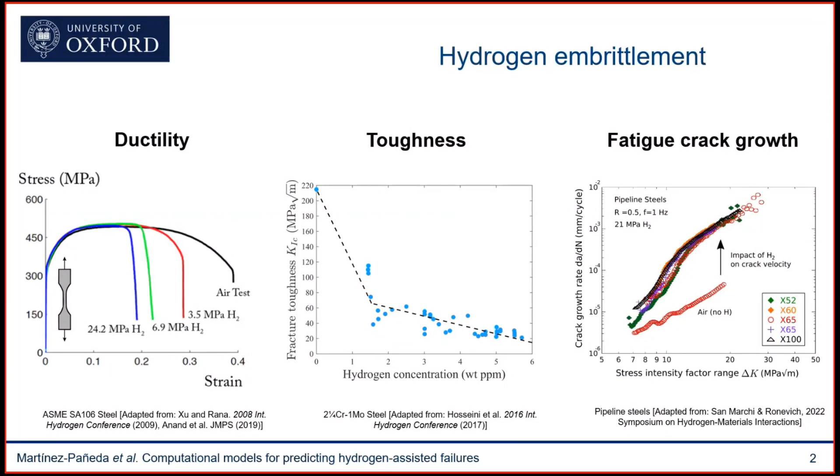Let me tell you a little bit of what we can do, and this will be the content of my talk. I will first start by telling you the ingredients of the model. What does the model do? What is the model based on?

Then I will show you some representative results showing how the model can predict hydrogen-assisted failures, not only at the lab scale, but also at scales relevant to engineering practice. And then I will finish with two case studies that I think will be of interest to many of us here.

The first one is trying to use the model to efficiently and cheaply conduct virtual fatigue experiments. There are only a few labs in the world able to run hydrogen-assisted fatigue crack growth tests in the presence of high hydrogen pressures. The plan is to show with the models first whether we can predict those experiments, and second, whether we can do virtual experiments to fill the gaps, so to say.

The second case study is that, as I said before, there's a lot of discussion on whether we can transport hydrogen in existing pipeline infrastructure. There again, of course, the critical problems relate to welds, which are typically the weakest link within that pipeline infrastructure. So we will use the model to show whether we can deliver predictions on what's the critical pressure at which we can transport hydrogen in those pipelines.

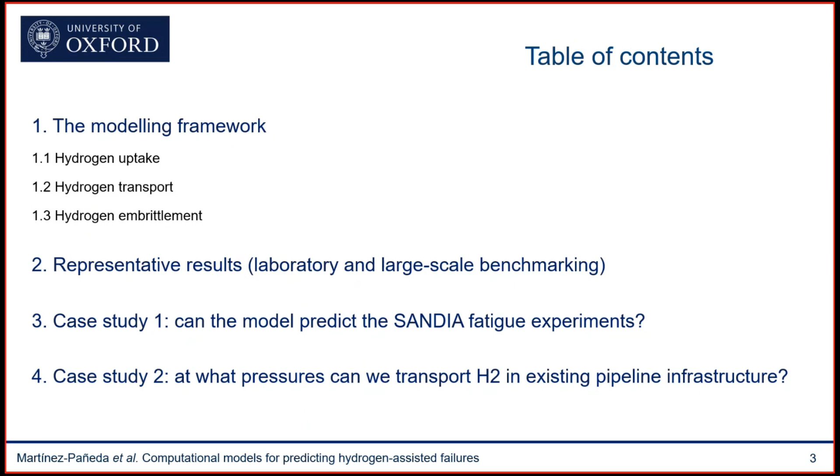This is another area where models are critical, because we know that the conditions relevant to welds are very difficult to replicate in laboratory experiments. It's also very difficult to run experiments on real large-scale pipes, because there's an oxide layer that takes significant action to be disrupted, and that oxide layer prevents hydrogen uptake. So you may be running these very expensive large-scale trials and getting nothing out of them, basically. So models, again, can make a difference.

So let me describe our modeling framework. I think there's two things I would say here. The first is that there have always been models, in the sense that you can always go to your lab, obtain a few data points, fit those data points with a polynomial function, and then claim that this is a model, but this is purely fitting.

What we wanted to do was propose a physically based model, a mechanistic model. By this I mean a model that explicitly resolves all the physical processes involved in hydrogen embrittlement, and that takes as input only physical parameters, material properties that we can independently measure in our lab. So this has always been our objective.

Only, I think by being mechanistic, by resolving the physical processes, by taking as input physical parameters, we can be confident that our model is not only able to interpolate between the experimental data points, but it's also able to extrapolate. And this is key in these hydrogen energy applications.

So let me walk you through each of the steps involved in the development of our modeling framework. I will be dividing the work into the three key stages involved in hydrogen embrittlement.

One is the uptake of hydrogen into the metal. This is quantifying how much, for a given environment, hydrogen enters the metal. The second is the transport of hydrogen in the metal, so quantifying the diffusion of hydrogen within the crystal structure and its trapping, sequestration at microstructural defects. And then the last one is the embrittlement process itself, the nucleation and growth of cracks due to the accumulation of hydrogen in critical interfaces.

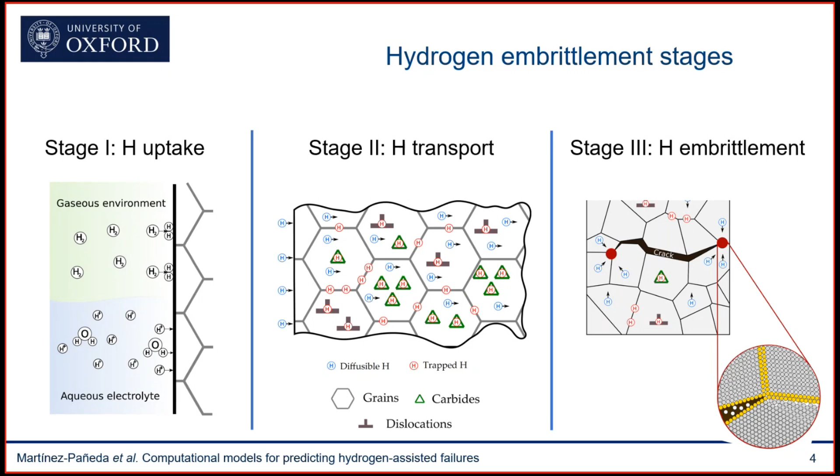So let me start with the hydrogen uptake. As I said before, the goal here is to quantitatively relate a given environment—it could be a gaseous environment or an aqueous electrolyte environment—with a hydrogen content at the surface of the metal, or a hydrogen absorption.

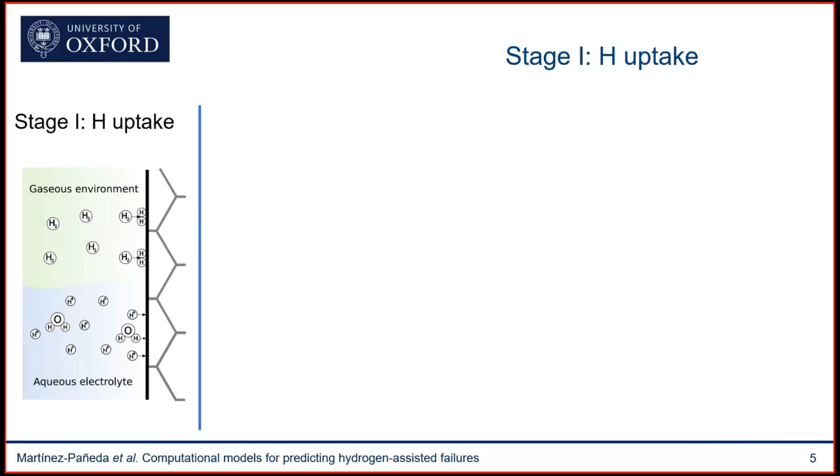I think the good news here is that when we are dealing with gaseous environments, this is relatively well understood, particularly if we're talking about steady state conditions. Kinetic effects are another business. But for steady state conditions, we know that in gaseous environments we can use a closed form expression, like Sievert's law or the Abel-Noble equation, to obtain an estimate of the hydrogen concentration at the surface of the metal as a function of the hydrogen pressure or fugacity.

And the only thing I want to emphasize here is that the coupling with mechanics is quite important. As you can see here, the solubility of the material depends on the hydrostatic stress.

So it's important not to neglect this term, otherwise you're going to significantly underpredict what is the hydrogen uptake ahead of cracks and other stress concentrators.

So that's the good news. The bad news is when you're looking at aqueous electrolytes, when you're looking at hydrogen uptake from aqueous electrolytes, such as seawater, for example, then the picture is much more complicated, because then you need to resolve not only the surface reactions taking place at the electrolyte metal surface, but also the electrochemical behavior of the electrolyte, which can be very different inside of occluded crack environments, such as cracks and pits and other defects, relative to the bulk, which is where you typically conduct your measurements.

However, I think the good news is that we know what are the differential equations that describe the physics of the electrochemistry of electrolytes, and we know what are the equations that describe the hydrogen evolution reactions, the Tafel-Volmer-Heyrovsky and absorption reactions. So we can formulate a theory and then implement that theory into a finite element context and obtain predictions for this.

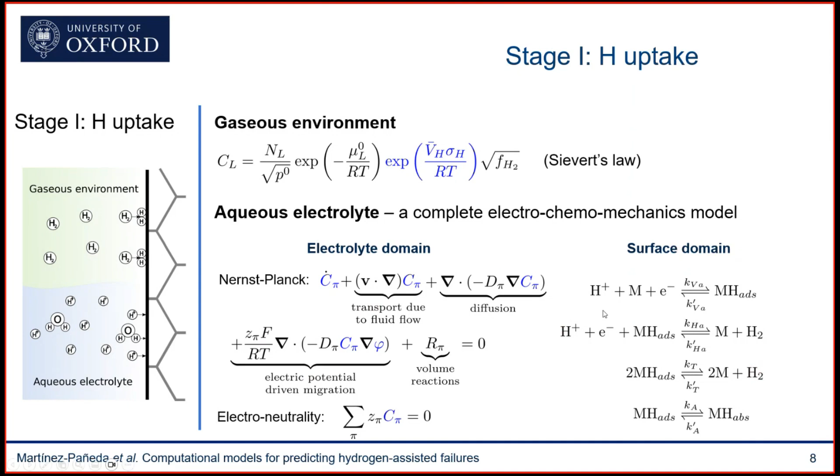So this is how the finite element model looks like. You may have an electrolyte domain, which has as many ionic species as needed, and then you have an electric potential as well. Then you have a metal domain, which might contain a crack or the type of defect where you're solving your mechanical problem, and you're also solving for the uptake of hydrogen and the transport of hydrogen. And then you have an interface between the two where you're solving for the hydrogen surface coverage.

I think the one thing that one immediately realizes here is that there's a lot of degrees of freedom. All of these things that I'm saying are degrees of freedom in your finite element model. So you have maybe 12, 15 degrees of freedom, depending on your problem, if it's 2D, 3D, how many ionic species you have. And solving this, 10 years ago, was unthinkable, but nowadays computers are powerful enough so that we can solve these problems without issues.

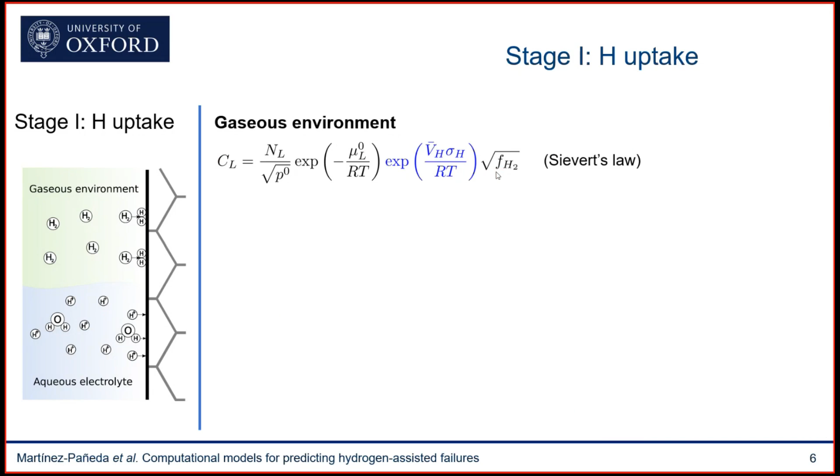And then we just need to go back to Sieverts' law and say, okay, since we know what is the hydrogen concentration, we can solve for the pressure, and we know that for this electrochemical environment, this is equivalent to testing metals in this other hydrogen gas pressure environment.

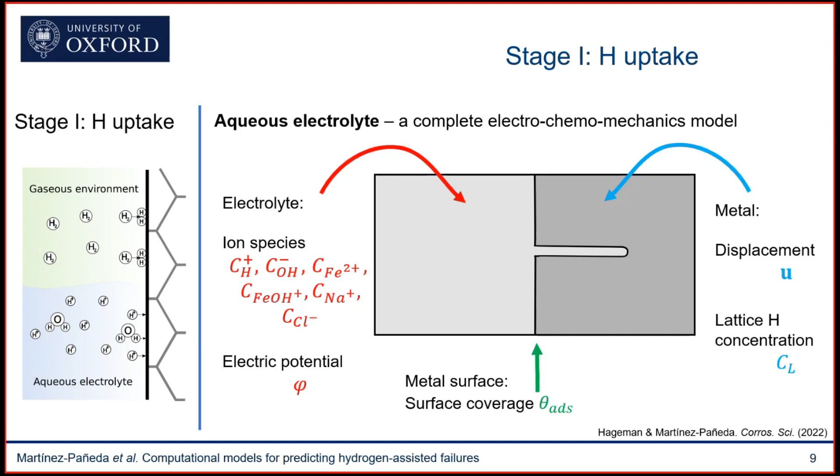And this is very good because not only does it allow us to leverage decades of electrochemical environmental research, but we can also do our experiments in much safer and cheaper conditions and obtain meaningful results, and plot our data as a function of hydrogen concentration, which can be directly connected to pressure.

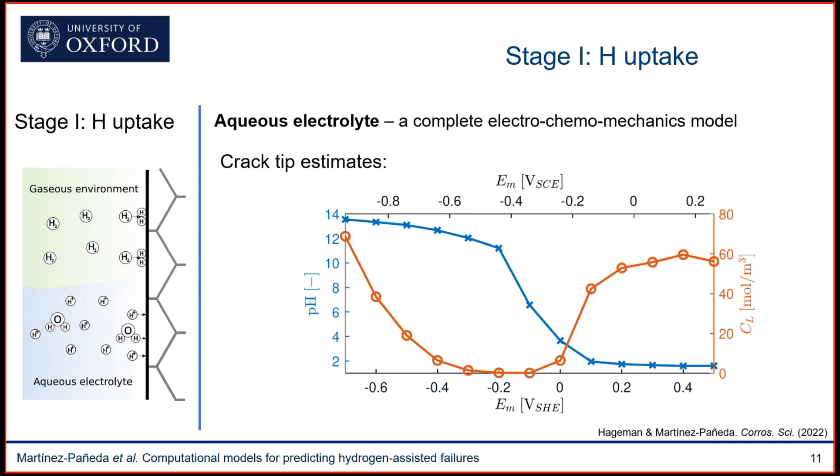That is one of the key questions in our community—this idea of the equivalent fugacity—that could be addressed with these models. Once we know how much hydrogen we have into the metal, we go to the second stage: we need to predict the hydrogen distribution within our component or microstructure, so quantify hydrogen transport and trapping.

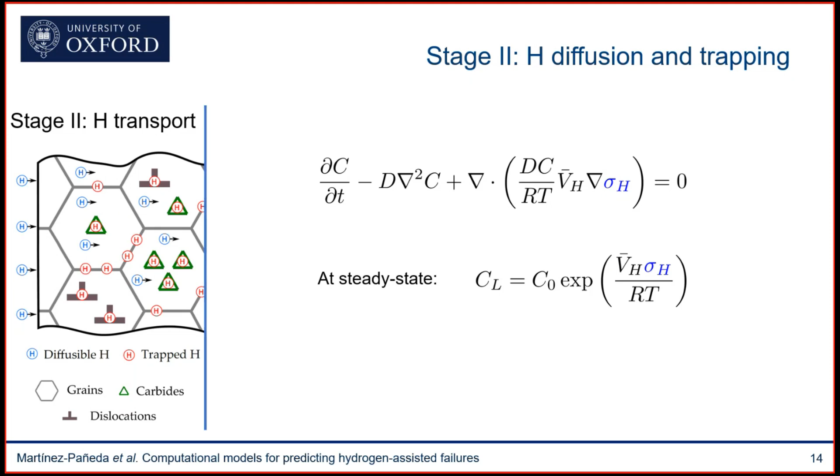But this is only one part of the picture. Hydrogen not only diffuses freely through the crystal lattice, it's also sequestered at microstructural features such as traps or defects. So we have developed more generalized extended formulations that account for these multiple trapping conditions, based on either Oriani's equilibrium or McNabb-Foster kinetics. One aspect I want to emphasize: if you want to predict hydrogen distribution within your microstructure and consider multiple types of traps, you need these multi-trap models because you need to quantify the binding energy and trap density for each defect.

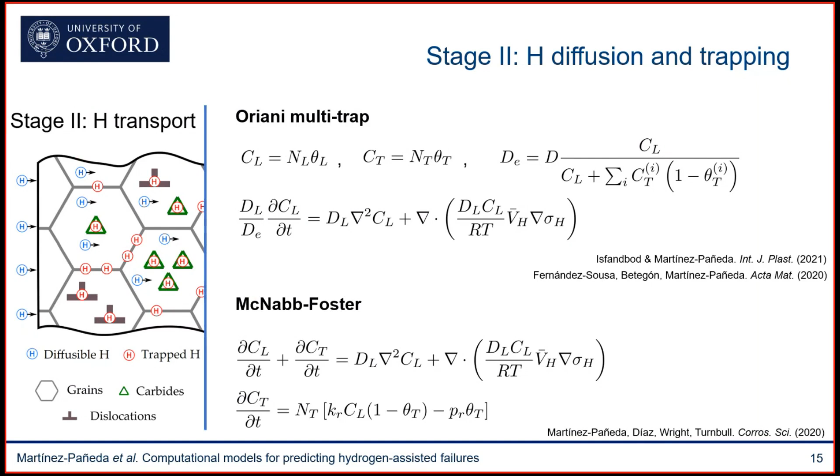You can have hydrogen trapped in grain boundaries and carbides. But when dealing with these locations, you need to account for the role that geometrically necessary dislocations play. Most models I've seen for hydrogen trapping consider only statistically stored dislocations related to plastic strains, but we should also consider GNDs, because experiments show they are very significant and dominate dislocation behavior near cracks and inclusions. So if you want to quantify hydrogen distribution at these locations, you need to quantify these GNDs related to plastic strain gradients.

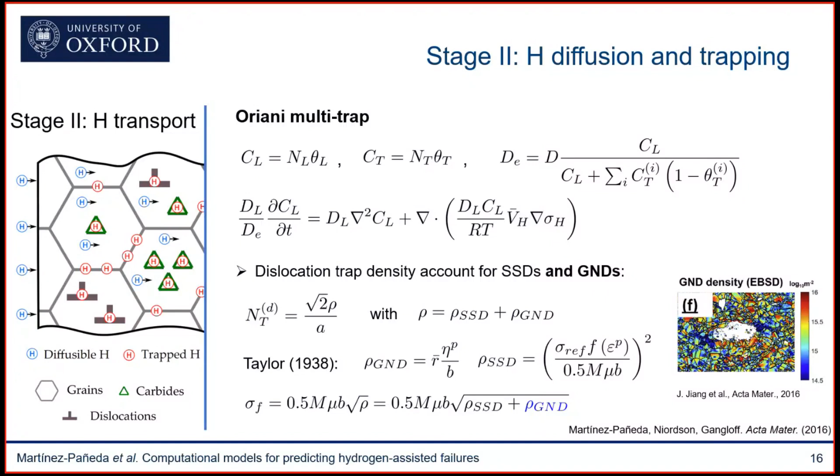This is important not only due to the role these locations play on trapping, but also due to the role GNDs play on elevating crack tip stresses. We know these GNDs act as obstacles to the movement of dislocations, and therefore bring local hardening in areas with high gradients of plastic deformation.

You can see this here—these are the tensile stresses ahead of a crack tip. There's a crack here, and I'm plotting the tensile stress ahead of it. Far away from the crack tip, predictions using constitutive models that account for GNDs—so-called strain gradient plasticity models—coincide with conventional plasticity. But as you approach the crack tip, there's a very significant stress elevation associated with the GNDs, with these plastic strain gradients.

This significant stress elevation near the crack tip, over the critical distance that matters for hydrogen-assisted fracture, is going to drive the hydrogen content near the crack tip as well. You can see it here—this is a log plot showing much higher predicted hydrogen concentrations when you account for the role GNDs play on crack tip stresses.

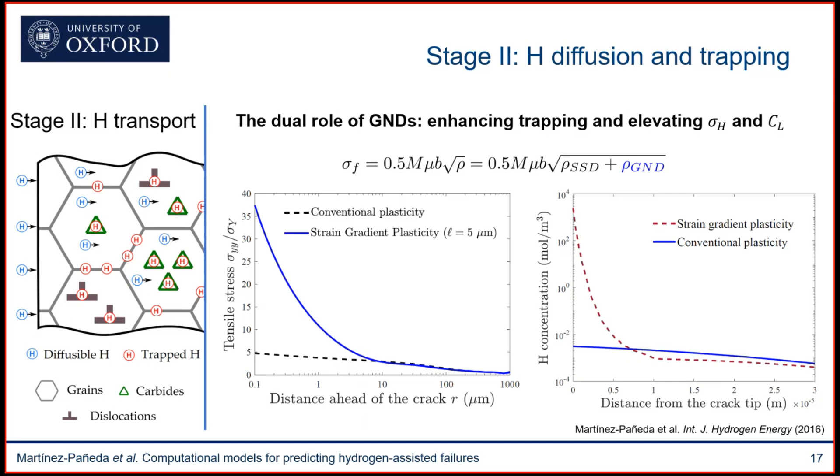And as I'll show later, this is also important because I would say this is the only way to rationalize the decohesion mechanisms.

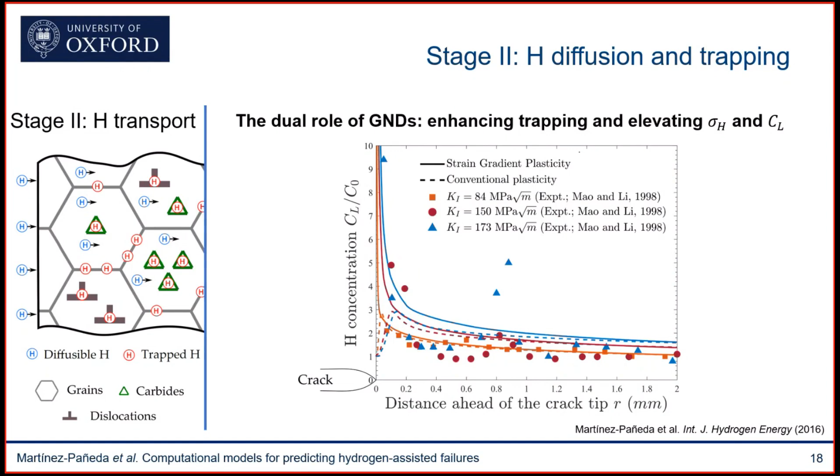We know that the decohesion arguments need higher hydrogen concentration than the higher crack tip stresses, and these GND effects, in my opinion, provide a solid argument behind them. So once you know how much hydrogen you have within your material, within your microstructure, then it's time to predict the fracture, the embrittlement process itself.

One aspect I'd like to mention is that the complexity here comes from the computational side. Predicting the evolution of cracks or other discontinuities is quite a challenging problem. You may have to apply moving boundary conditions, and you need to change your finite element mesh. It's quite a complicated problem.

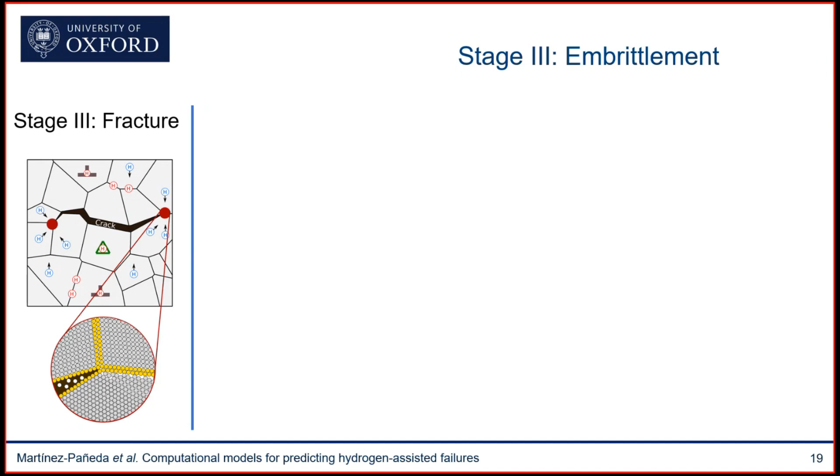But there has been a development in the computational fracture mechanics community that, in my opinion, has really changed dramatically the way we can tackle these problems, and made our life significantly easier. That is the development of the so-called phase field models. This is the approach we followed, and the idea is quite simple.

Whenever you have two phases, it could be a cracked phase and a solid phase, intact material points, you can treat that interface as discontinuous, or you can smear that interface over a finite domain and use an auxiliary variable, the phase field, to describe where the interface lies. This implicit treatment of interfaces is computationally very compelling for multiple reasons.

One reason is that the interface equation is defined in the entire domain, so there's no need for any special treatment. Another is that topological changes such as division or merging of interfaces are naturally captured. A final convenient aspect is that the interface equation can be easily combined with equations describing other physical phenomena.

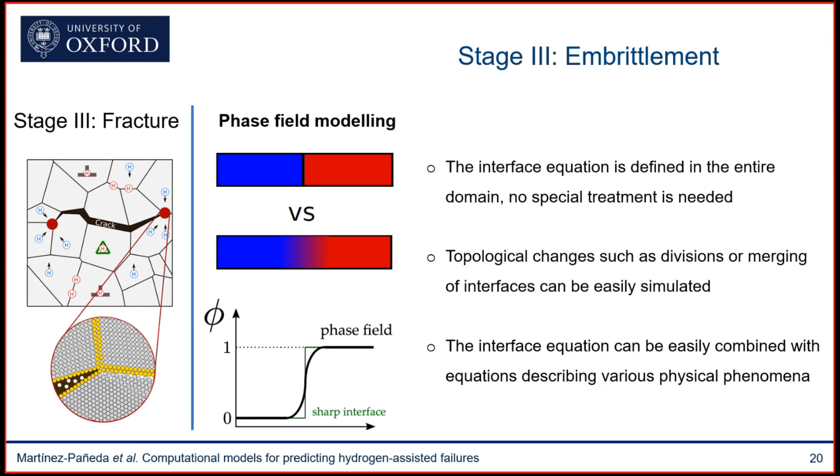Phase field modeling has been a revolution in many areas of science and engineering. It all started in the condensed matter physics community, where it's now by far the most widely used technique to simulate microstructural evolution. It has very quickly become the dominant tool also in fracture mechanics.

We have recently shown that this paradigm can also be extended to corrosion. You can use these phase field models to describe the evolution of the corrosion front, the interface between the aqueous electrolyte and the metal, and therefore resolve the physical processes involved in corrosion.

But what I'm focusing on today is fracture mechanics, and as you can clearly see, you can capture problems of arbitrary complexity. You can see here multiple cracks, crack branching, coalescence of multiple cracks, initiation of cracks on secondary sites. So no matter what the complexity of the problem is, the method is quite robust.

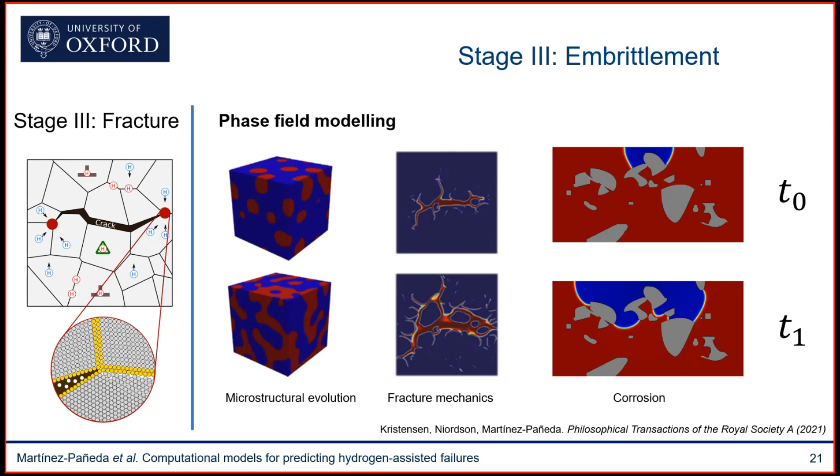One key aspect to emphasize is that these are not just fancy colors, the predictions provided by these phase field fracture methods are physically very sound. The reason is that phase field provides a computational platform for Griffith's energy method, going back to Griffith and the foundations of fracture mechanics and the thermodynamics of fracture.

As you know, Griffith postulated that a crack will grow whenever the energy stored in the solid was sufficient to overcome a critical quantity, the energy required to create new surfaces, which is the fracture energy or critical energy release rate. You can postulate this Griffith balance in a variational form, and if you're able to minimize this functional, you can predict the evolution of cracks as an exchange between the energy stored in the material and the fracture energy.

However, solving or minimizing this functional is quite complicated for computational reasons, since you don't know where your crack surface gamma is. But here's where the phase field comes to the rescue, because we can use the phase field as a marker, interpolating between intact material points and fully cracked material points, acting a little bit like a damage variable.

You can see here the phase field goes from 0 in intact material points to 1 inside the cracked and fully cracked material points. It's a non-local damage model in the sense that there's a gradient and a length scale, which means all predictions are mesh objective, independent of the finite element mesh used, as long as you can resolve the length scale. And like a damage model, it reduces the stiffness of the metal.

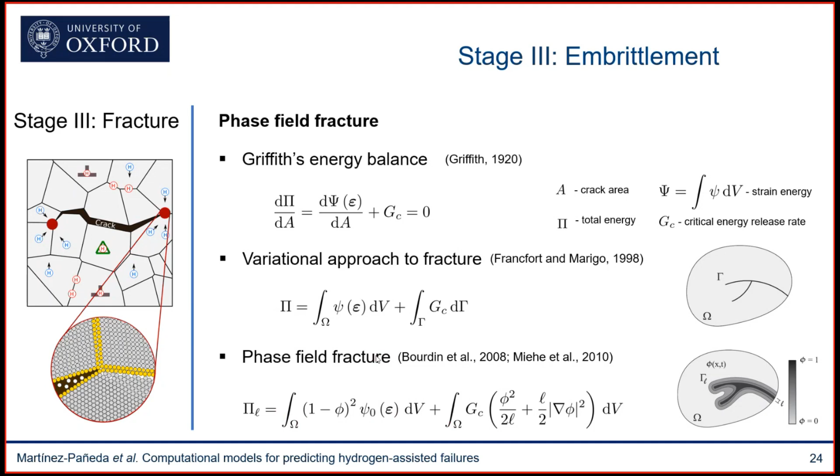You can get a good overview by looking at the governing equations here. You have a balance equation for the standard balance of linear momentum, where the phase field degrades the load carrying capacity of the material.

And then you have an equation for the evolution of the phase field, which is essentially a competition between the energy stored in the material, the strain energy density, and the fracture energy, the energy required to create new surfaces, a material property that you can measure. And just by solving this additional differential equation, we're able to predict fracture problems of arbitrary complexity.

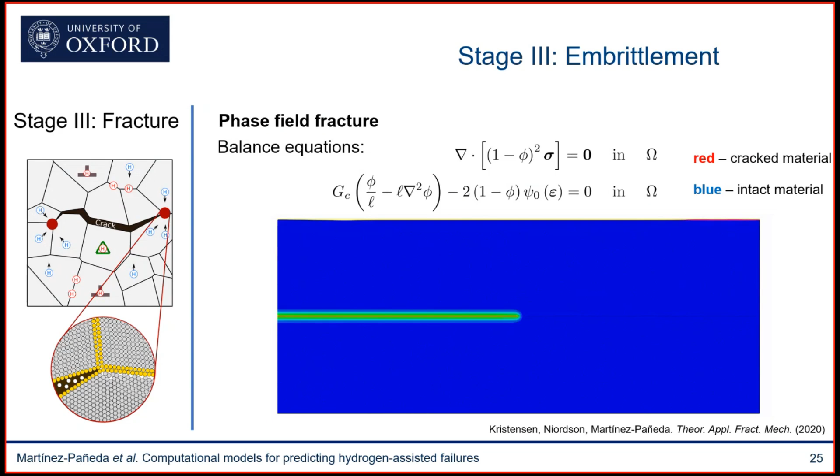And this slide summarizes why it has been so popular in the computational fracture mechanics community. You can see here that it not only is able to capture very complex cracking phenomena, but is able to do so providing a remarkable agreement with experiments.

And so my goal was basically to extend this success of phase field to hydrogen embrittlement. And I think this was very important to me. When I realized at the time that this was very important, it was going to be very impactful, because phase field

in a way not only is computationally very powerful, and this means that it can be used to solve very complicated problems in our labs, but it can also be used to solve problems at the engineering scales. Engineering practice often involves very complicated problems, much more complicated geometries and components than where we typically deal with our standard laboratory experiments.

And I realized that phase field could give us those capabilities, but also the fact that phase field is so closely connected to fracture mechanics, that it provides predictions in agreement with conventional fracture mechanics theory, was a key factor of it, I thought, because the fact that you are able to, on the very simplistic scenarios where conventional analytical fracture

mechanics can give you a solution, provide the same results, means that your predictions are not only going to be built on decades of fracture mechanics research or on a well-established theory, but also your predictions are going to be in agreement with what engineers and practitioners are doing.

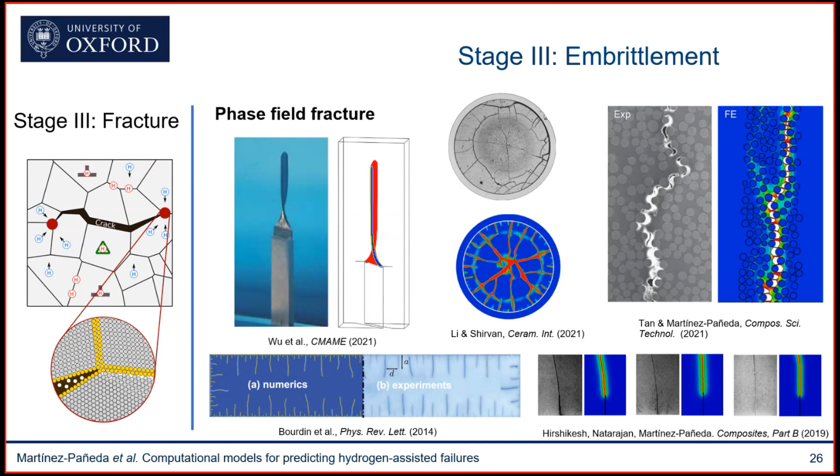So in a way, designers are using fracture mechanics in their codes. By using phase field, they're going to be able to predict exactly the same in the idealized circumstances where they are working on, when they need to do simplifications. You assume that you have one crack, mode 1, and so forth, but also allow them to go beyond that and take their fracture mechanics understanding to more complicated scenarios, which often appear in engineering practice.

So my goal was to extend this success to hydrogen embrittlement. And if you want to do so, I guess the simplest problem you can solve is a 3-field problem, where you're solving for the deformation of material, the hydrogen transport, and the damage process.

And I think the good news is that this framework is universal. So there's many ways that you can approach it. One way is, of course, a phenomenological way. And many of our industrial partners follow this approach. We have lots of experimental data of fracture toughness versus hydrogen gas pressure. So we could just feed that data and input this into the model.

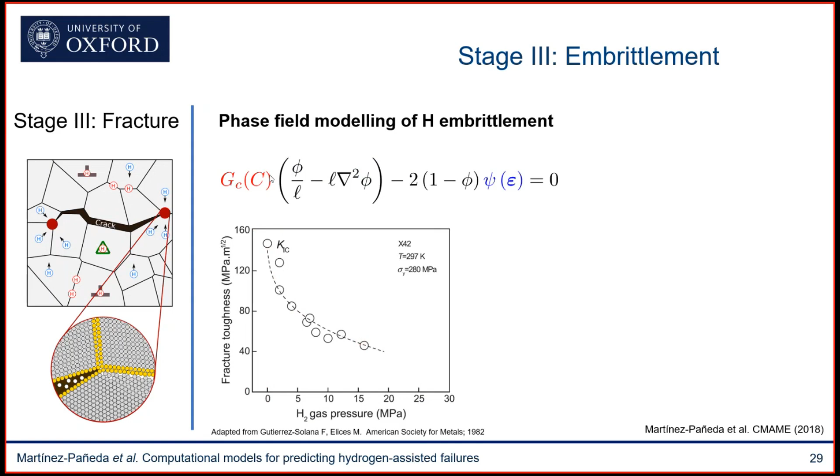But we can go beyond it. For example, if we're thinking of designing metals with resistance to hydrogen embrittlement, we need to go beyond that. We need to be fully mechanistic. And the good news is that this framework can accommodate any mechanistic interpretation. So you can define your hydrogen degradation function as a function of any micromechanical or macromechanical parameter that you believe is of interest: the hydrogen trapping in grain boundaries, the dislocations, the plastic strain, dislocation density, whatever you believe matters. So let me tell you a little bit of what I think matters.

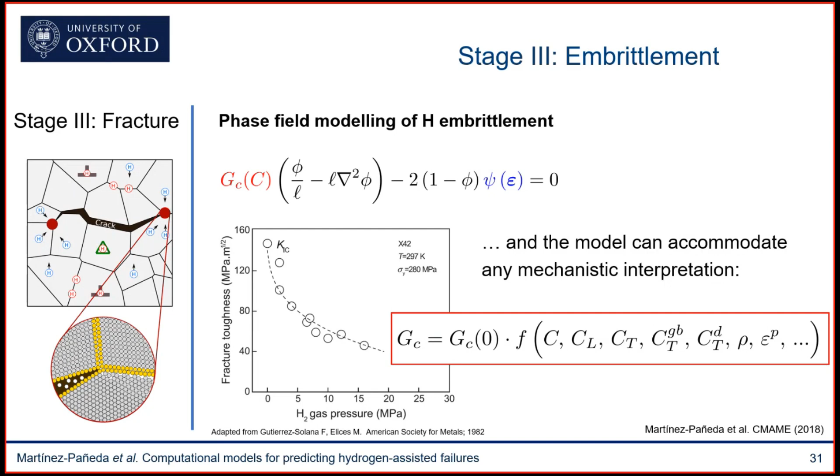My goal at the very beginning was not to provide a model that required a lot of fitting with experiments, but to provide a model that could deliver blind predictions—with no fitting, or minimal fitting, only measurements of material properties—and still be able to deliver reliable predictions.

So for that, we need to define the shape that this mechanistic degradation function should take. This requires answering the question of how hydrogen makes metals brittle. How can it be that a material which fails in a very ductile fashion through microvoid coalescence in the absence of hydrogen, suddenly fails in a very brittle fashion, with cracks often propagating along grain boundaries, in the presence of hydrogen?

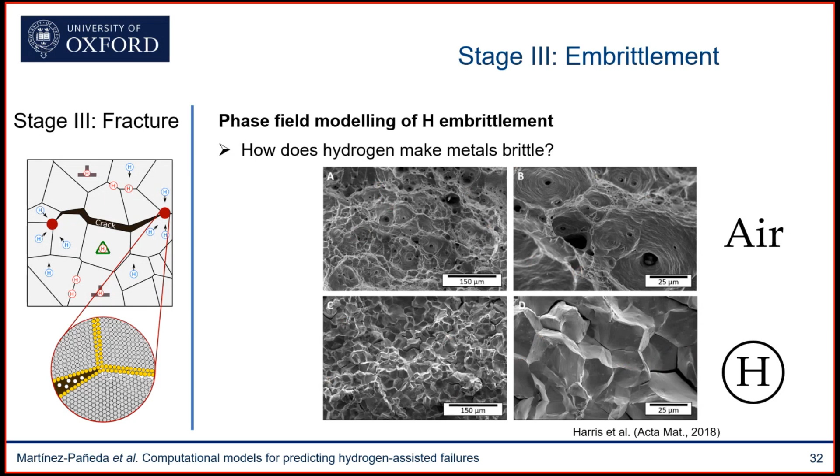In my opinion, to understand why this happens—how just adding hydrogen into the material causes this ductile to brittle shift—we need to understand three key ingredients.

The first one is that if we look at our problem across the scales, if we do atomistic calculations, we see a very significant reduction of the bonding strength of metal atoms with hydrogen occupancy. Here you can see DFT calculations for nickel, predictions of fracture energy versus hydrogen occupancy, for two types of grain boundaries in nickel. If your grain boundary is full of hydrogen, with occupancy close to 1, you get a 40% reduction in fracture energy, or grain boundary bonding strength. So that's significant.

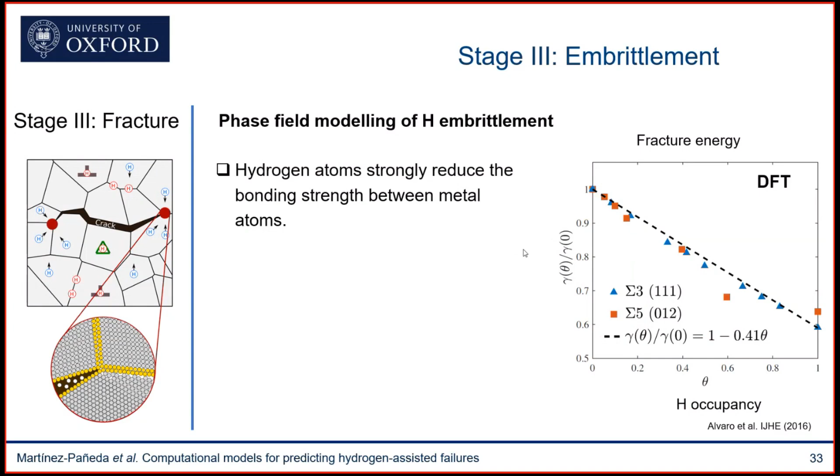But of course, the key question is: where are we on this x-axis? Because if the hydrogen occupancy in the grain boundary is somewhere low, then this is a secondary effect, and there must be other mechanisms playing a role. The answer to that comes from the thermodynamics of trapping.

We can do experiments in our lab and measure binding energies—how energetically favorable it is for hydrogen to go to certain microstructural defects. We can use Oriani's equilibrium to relate those binding energies with the hydrogen concentration and the trap occupancy. This is what you're seeing here: hydrogen concentration, binding energy, and trap occupancy.

We know, and can measure in our lab, the binding energy for grain boundaries, and we know it's higher or smaller than -40, so we are somewhere here. We can see very easily that the occupancy of my grain boundaries is effectively going to be full of hydrogen, for hydrogen concentrations as little as 0.2 ppm or so. So for very low hydrogen contents, it's already very energetically favorable for my grain boundaries to be full of hydrogen. Going back to the atomistic calculation, I know I'm going to be somewhere here, and therefore we get a very significant reduction of fracture energy.

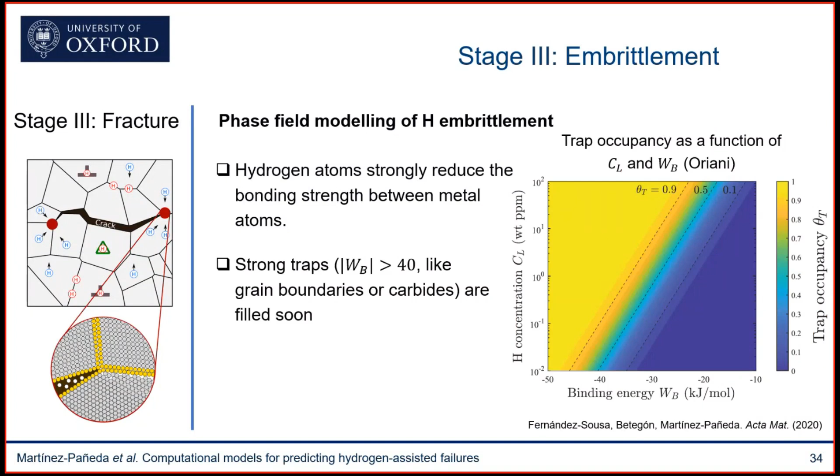So the question that remains is: is this 20 to 30 to 40% reduction in bonding strength sufficient to trigger a change from ductile fracture to cleavage fracture? We know the theoretical lattice strength of the grain boundary is 9 to 10 times the yield stress, so a 30 to 40% reduction maybe isn't enough.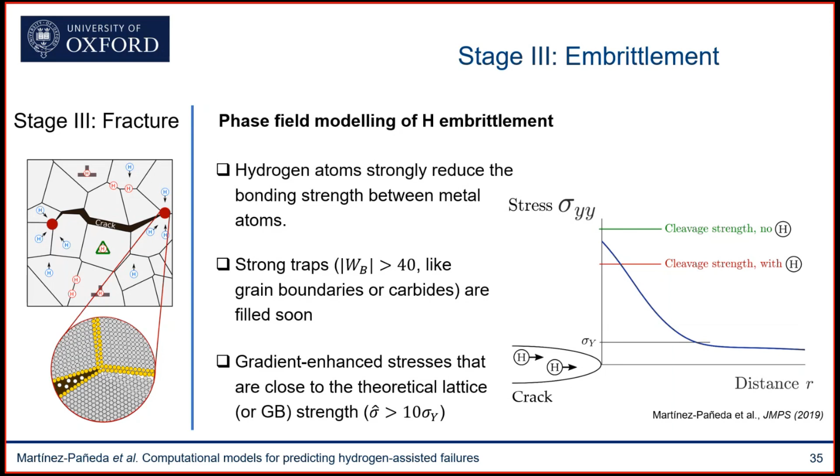You have a model that is naturally capable of predicting the change from ductile to brittle fracture scenarios just by introducing hydrogen to the model, with no fitting parameters whatsoever—just an atomistic calculation you need to run once in your lifetime, offline.

This is easy to incorporate into the model, since we're solving a multi-physics model for the hydrogen distribution within our sample. We can then use Oriani's trapping equilibrium to relate the hydrogen concentration to the trap occupancy in whatever interface is relevant, like a grain boundary. Then we go to the atomistic calculation, take the coverage, and decide quantitatively how much we reduce the fracture energy. So everything can be naturally incorporated into the model.

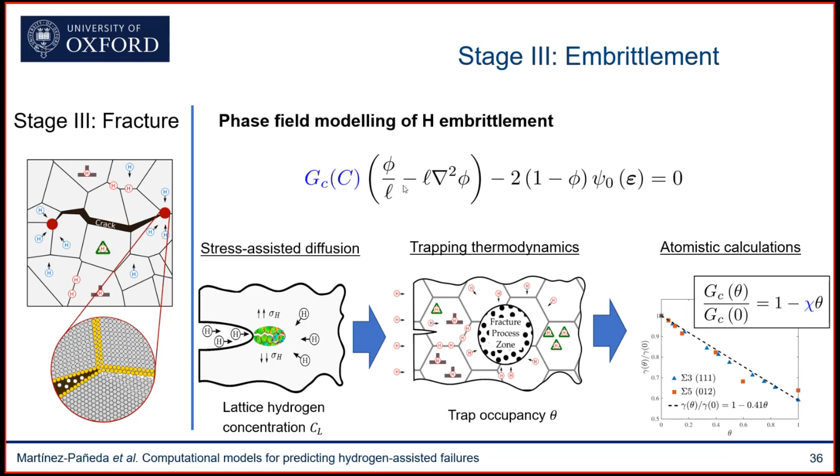So let me show you some results to show how the model is able to predict our experiments. First, I'm going to show some results on R curves—these are crack growth resistance curves.

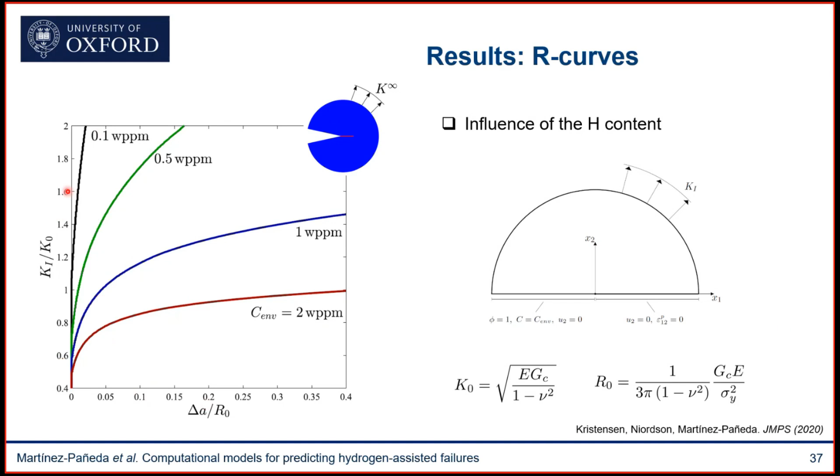So what I'm measuring here is a measure of the crack tip load, and this is the crack extension. You can see, in agreement with experimental observations, if you increase your hydrogen content, then you get a lower fracture resistance, as you see here.

Here I'm showing another classic experimental observation, which is the influence of the loading rate. We know that if we load our samples very fast, there's not enough time for the hydrogen to distribute within our sample, and therefore we get less embrittlement. But if we load slowly, there's more hydrogen distribution within the sample, and this brings a reduction in the crack growth resistance curves, as you can see here.

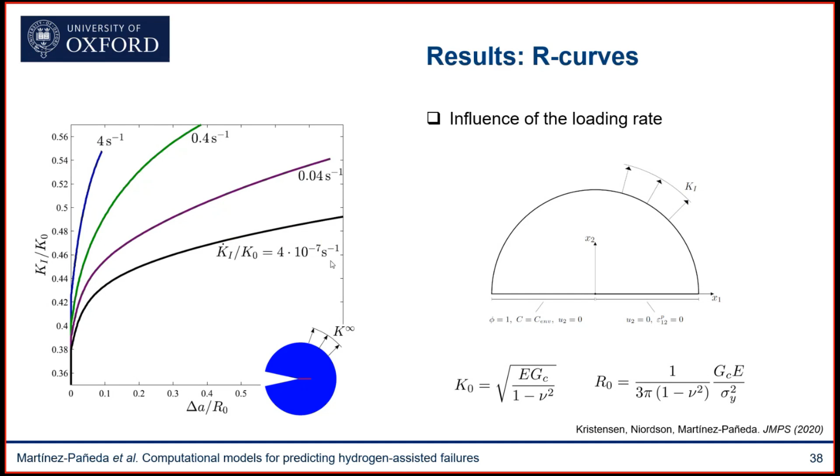But we can also be quantitative - those were qualitative observations. Here's a comparison with experiments on pre-charged steel bars. These are high-strength steels, and you can see that the measurements of notch tensile strength versus hydrogen content are in very good agreement with the model.

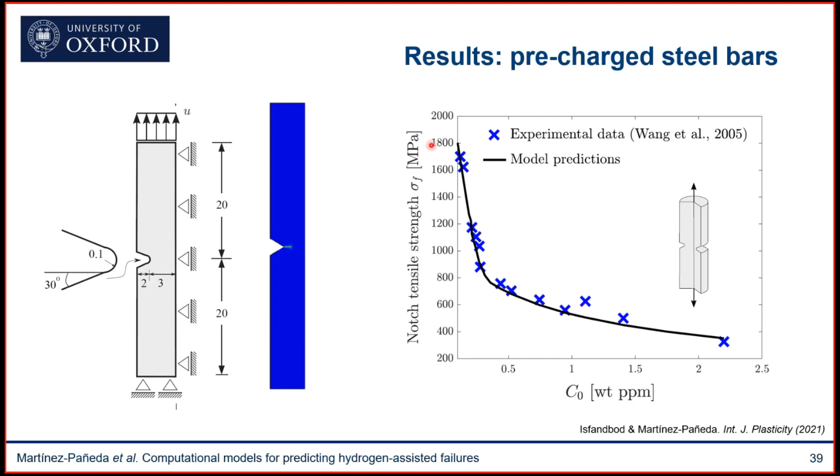This is a set of interesting experiments conducted at SINTEF. Here they have duplex stainless steels that were immersed in a seawater bath. They contain a notch, and they were subjected to a constant remote stress, and then the time to failure was measured. The dots, or symbols, are the experimental data points, and you can see that all of the samples fail relatively early for engineering standards.

But we can take our model and not only reproduce the experiments, gaining confidence in our predictions, but also run virtual experiments over very large timescales, which allows us to determine the remote stress threshold below which embrittlement will not happen. So this is another ability of the model - we can run very large experiments, either large in time scale or space scale.

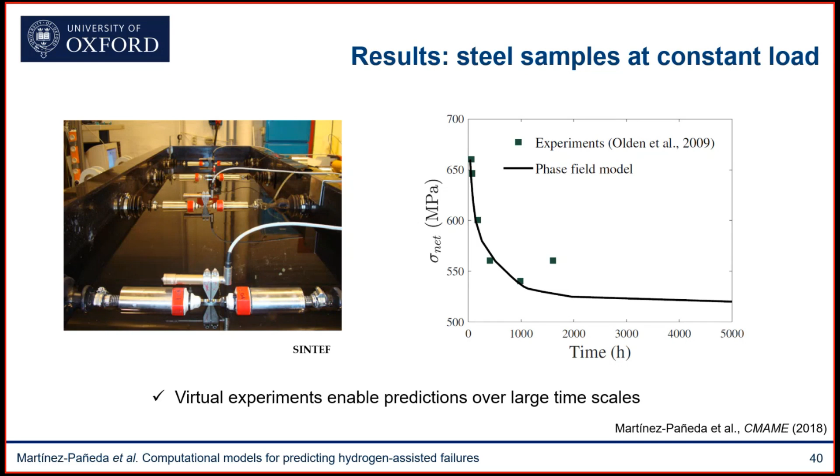This is another interesting set of experiments, in collaboration with our colleagues at UVA. They were very interested in assessing the suitability of slow strain rate tests, SSRTs, to characterize the susceptibility to hydrogen damage. Their suspicion was that this test was not suitable because cracks will initiate earlier in the test. So we took our model.

First, we showed that the model was able to capture the failure time in the absence of hydrogen. We then introduced hydrogen for multiple environments, and we were able to show that the model was able to capture the failure times for multiple environments and multiple types of Monel K-500 alloy, which is the alloy we're interested in here.

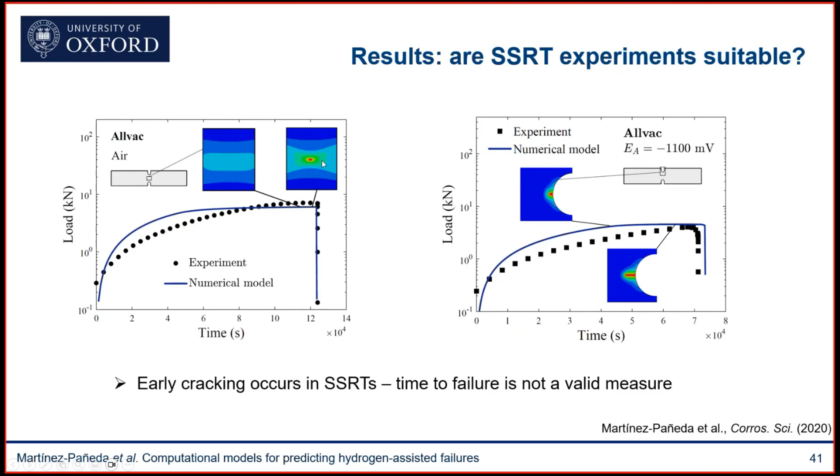And what we saw with our model is that it was also able to capture what you see in the experiment - you get this kind of ductile instability when looking at the experiments in air. But we saw that the model was predicting that cracking initiated relatively early in the experiment, and therefore made these SSRT experiments not suitable for assessing hydrogen embrittlement susceptibility. One has to do fracture experiments.

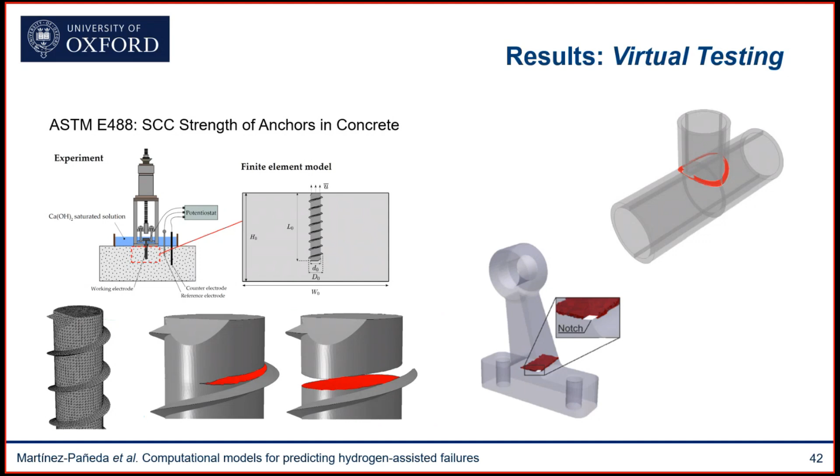And we can model anything we want - large-scale components. We can simulate the failure of large-scale components such as pipelines or any other geometry. Effectively, we're bringing this idea of virtual testing to hydrogen-containing environments, and this was kind of our goal. And more excitingly, we can correlate this with inspections.

So here you see a pipeline. It's a 12-kilometer pipeline that was characterized by Nicola Larrosa and co-workers at BP. This pipeline contains multiple defects - hundreds of corrosion defects, these are pit corrosion defects. So we can model that pipeline. We chose to model a critical section of 3 meters that contains more than 100 of those defects.

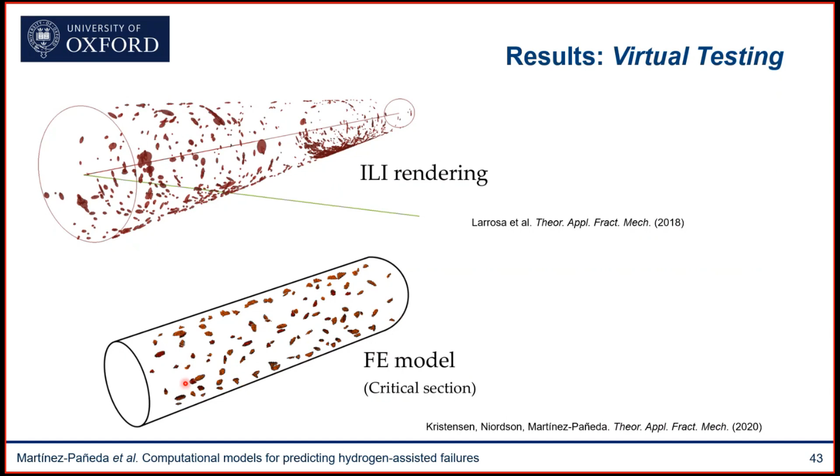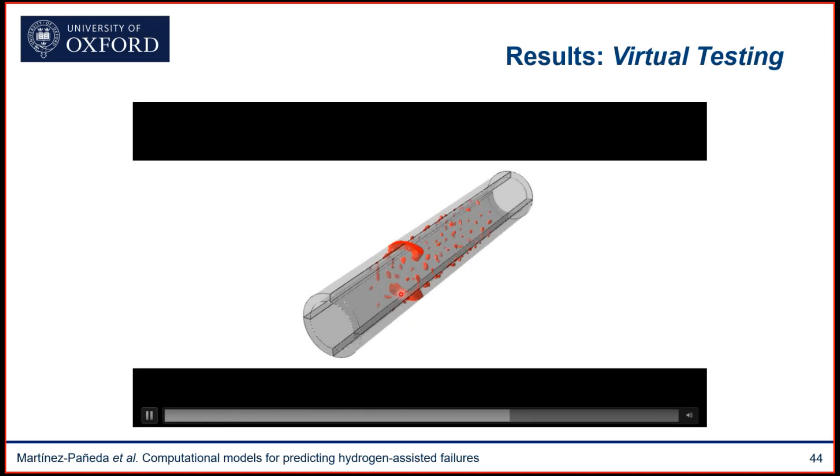We can very easily incorporate those defects into our model because we are solving for the phase field as a degree of freedom, so this is basically an initial condition. Then we can subject the pipeline to in-service conditions, and we can see how those defects start growing, how they merge with each other, and then eventually how they grow and extend, and you get a complete collapse and failure of the pipeline.

You can see it here as well.

But the key takeaway here is that we finally have a tool that allows us to predict when hydrogen-assisted failures will happen as a function of environment, material, and loading conditions. This tool is not only able to deliver predictions at the lab scale, but it's also able to do so at the scales and complexity conditions relevant to engineering practice. No matter how complex the problem is, we can handle it.

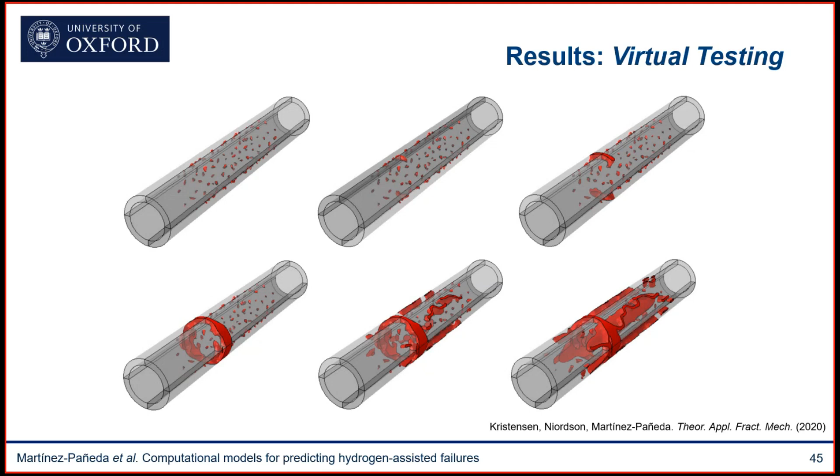It looks a little bit like a video game, but in reality it's quite a sophisticated mechanistic computational framework that explicitly resolves all the physical processes involved in hydrogen embrittlement. It takes only as inputs physical parameters that we can measure independently.

We have also extended this to microstructures. Traditionally in the hydrogen embrittlement community we were not too worried about the microstructure because we always deal with situations where you have pre-existing defects larger than the relevant microstructural length scales. But there are many other scenarios these days, for example the initiation of fatigue cracks in austenitic stainless steels, where microstructure plays a role. This is also relevant if you want to design new alloys and test these new alloy designs.

We can extend these models to capture the role of the microstructure, and you can see some examples here where we're simulating in 2D and 3D the propagation of cracks while resolving the anisotropic nature of the microstructure.

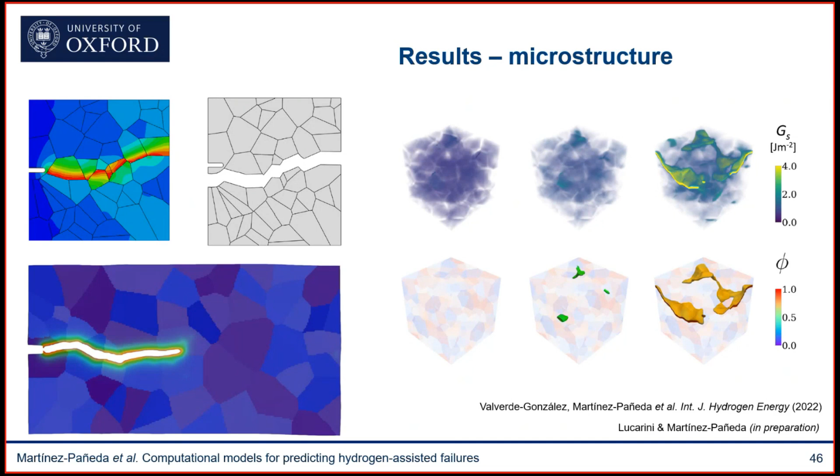We have also combined this with those phase field corrosion models that I was talking to you about before. This is quite powerful because it allows us to develop generalized stress corrosion cracking models, where we don't have to make any a priori decisions on which mechanism is dominating the cracking process. We don't need to say a priori that it's going to be hydrogen embrittlement or anodic dissolution. We just run our model, provide environmental conditions, and let the model pick which mechanism is going to be dominant.

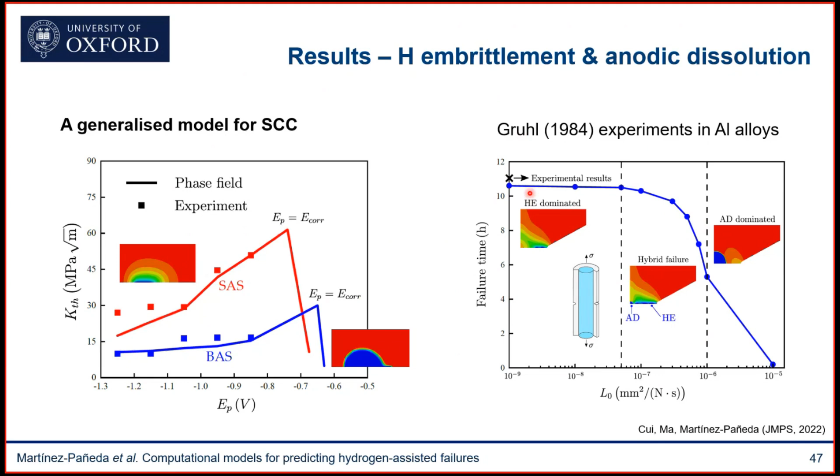That allows us to deliver predictions over a wide range of applied potentials. For any choice of environment, you can see here that we go from the cathodic regime, where hydrogen embrittlement dominates, to the anodic regime, where anodic dissolution dominates. We can also capture the interplay between the two. This is, for example, a representation of the classic experiments by Gruhl on aluminum alloys, where he was trying to understand the interplay between hydrogen embrittlement and anodic dissolution.

These are, by the way, cycle-by-cycle calculations, so this is computationally time consuming. But we have developed algorithms and methods to accelerate these calculations, and we can now do millions of cycles.

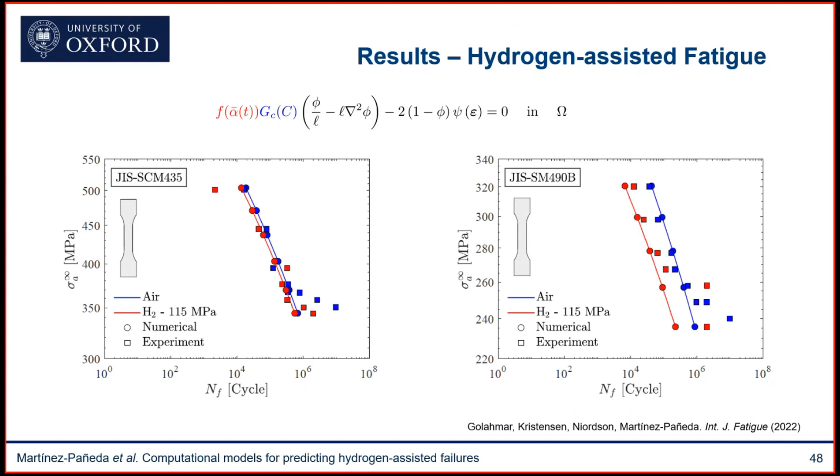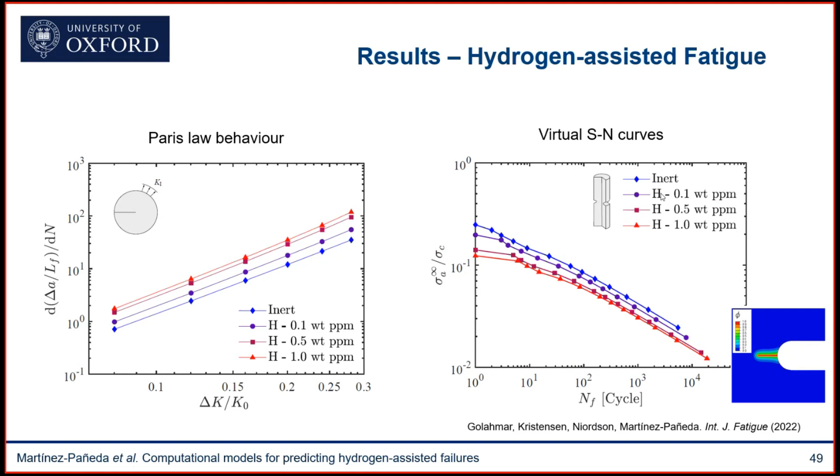Let me finish with these two case studies that I think will be of interest to many of you. The first one deals with hydrogen-assisted fatigue. We know cyclic loading is the most relevant loading scenario for many of the applications where we're interested in working with hydrogen in the energy transition.

For example, pressure vessels or even pipelines, cyclic loading is relevant. So we need to be able to understand how metals behave when you have a combination of cyclic loading and hydrogen uptake. This is problematic because running these experiments is costly, first of all, but also challenging from a health and safety point of view. However, luckily, there are a few labs in the world who are able to do that.

This is the result in air, and this is for different hydrogen-containing environments.

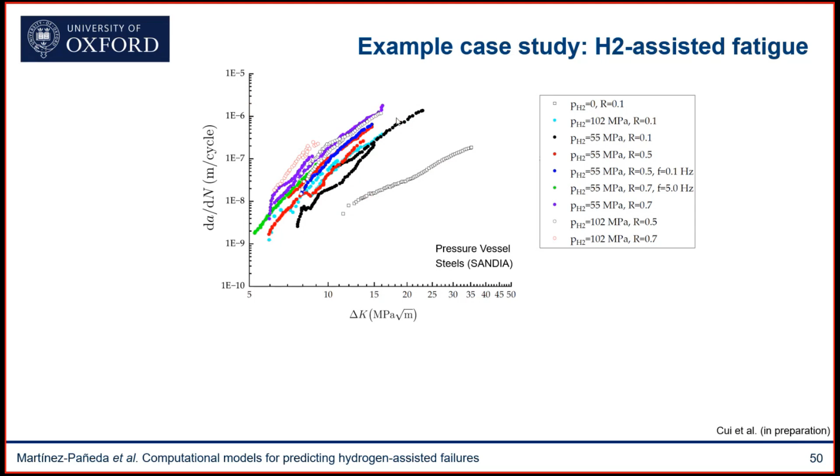But we want to go beyond this data. There's a motivation to develop models able to reproduce these experiments, to run virtual hydrogen-assisted fatigue crack growth experiments for multiple reasons. One is that there's a sensitivity to the loading frequency. Normally in fatigue we don't care about loading frequency, but once we have hydrogen, we have diffusion, and therefore timescales matter.

We know that the lower the loading frequency, the higher the susceptibility to hydrogen embrittlement. So we want to test at very low loading frequencies. Real applications, like pressure vessels for hydrogen charging, involve very low loading frequencies. But experiments need to be conducted at relatively high frequencies because otherwise it's very time consuming, and there are also challenges related to leaks at low frequencies. So it's a problem because we are on the non-conservative side: we run fast experiments, but we know slow experiments show more susceptibility, and applications involve slow loading frequencies.

Of course, the data is tied to the test conditions. These expensive experiments are related to a specific loading frequency, a specific load ratio, a specific material, a specific pressure. So every time you want to go to a different regime, you need more experiments. Every time you want to test a new material, you need more expensive tests.

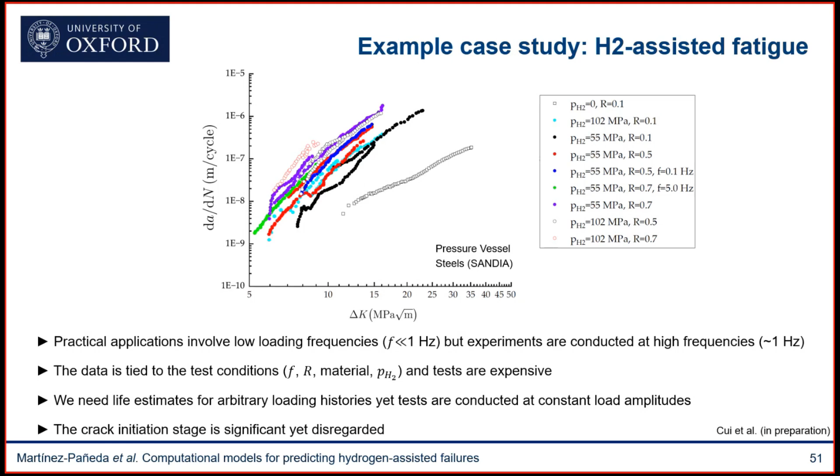Also, we want to obtain life estimates for arbitrary loading histories, but these tests are conducted at constant load amplitudes, and we're also disregarding the crack initiation stage, so we want to incorporate that into our model. We have data to test our model, so let's see how our model behaves.

The first thing is we try to calibrate our model's response in air. This is fatigue crack growth curves versus applied stress intensity factor range, the Paris law behavior, for a given load ratio and frequency. We run our experiments, subjecting compact tension samples to cyclic loading conditions. We propagate a crack and measure the speed at which it's propagating. We know the fracture toughness of the material, so we just need to calibrate the fatigue degradation function, and we're able to capture how this material behaves in the absence of hydrogen.

Now there is data for hydrogen at multiple pressures, for example 55 megapascals. So we don't touch anything in our model—let me emphasize, I'm not touching any parameter. My model remains exactly the same. The only thing I'm doing is enabling hydrogen diffusion. I know the hydrogen concentration that corresponds to this pressure of 55 megapascals, and I put that as my boundary condition. I pre-charge my sample for 24 hours, as they do in the experiments, and then run my test.

The only interplay between hydrogen and the fracture resistance of this material is the fracture energy reduction with hydrogen content that I showed before, which is well characterized for this pressure vessel steel. So we have a proper fracture toughness versus hydrogen content curve. I run my virtual fatigue experiment, and this is the response I get. The symbols are the experiment, the solid lines are the computational predictions—a very good agreement.

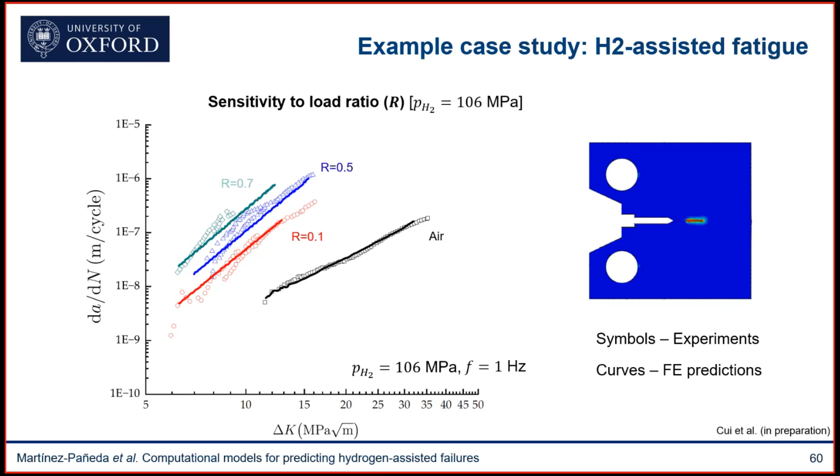This is for a pressure of 55 megapascals, but they also have data for a pressure of 106 megapascals. You can see here that we don't touch anything in our model. We just change the loading ratio and the external hydrogen pressure, and we get very good agreement with experiments.

They also have experiments for different loading frequencies. Again, not touching anything in our model, I'm just going to change the loading frequency. And again, a very good agreement with experiments.

This is for a load ratio of 0.5, but they also have data for different frequencies at 0.7. We change the frequency, we change the load ratio, not touching any of the parameters of the model. There's no fitting here whatsoever. Again, a very good agreement.

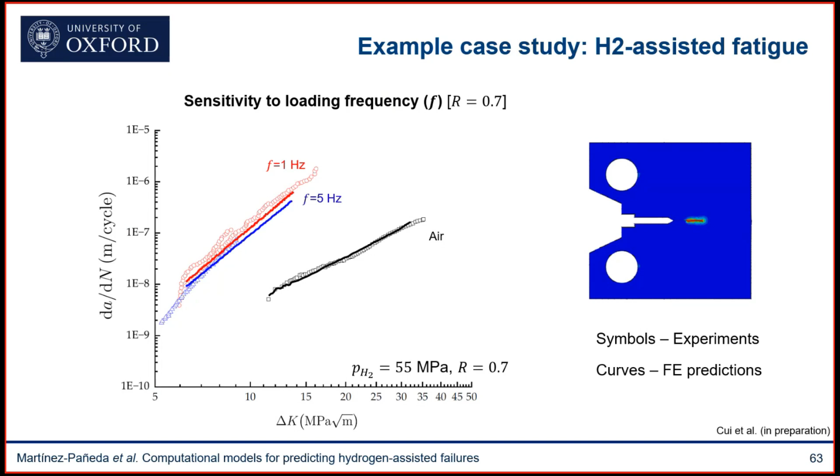So this gave us confidence that the model is very robust and is working very well. We were quite excited about this ability of the model to blindly predict the different scenarios, changing loading frequency, pressure, and load ratio. But then we said, okay, let's use the model to try to understand things that we don't figure out from the experiment.

That we need to know but cannot figure out from the experiments. One thing is that these experiments are done as soon as possible, basically.

So you don't pre-charge your samples. You have to pre-charge them for 24 hours because that's the time it takes to get the machine set up and running. But then after that, you just load your sample. So we wonder, maybe this is not the most relevant scenario. It could be if you have an oxide layer, but maybe it's not the most relevant scenario to real applications where you may have your pipeline or pressure vessel exposed for a very long time to hydrogen.

So what we do is in our experiments, we pre-charge our samples. And unlike the experiments, in our virtual experiment, we can do this quite fast. That's the reason why they don't do it in practice. So we can pre-charge our samples quickly, and then we run the fatigue experiment.

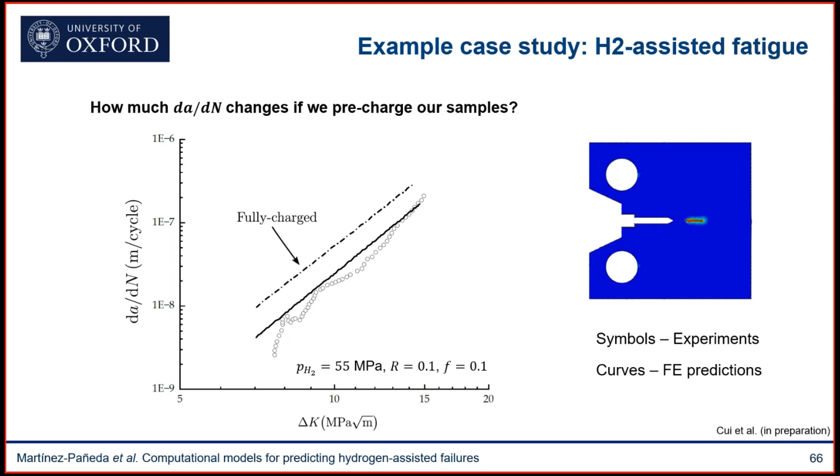And this is what we see: an increase of 2 to 5 times in the fatigue crack growth rates versus the data obtained in the absence of this pre-charging. I don't know if 2 to 5 times is important or not. That is for the engineer to decide whether this increase in fatigue crack growth rate is important or not.

Another aspect that we can do is the role of frequency. I mentioned before, the experiments are typically conducted at frequencies of 1 hertz because this is what is practically convenient. From time to time, there are experiments conducted at lower frequencies, but this is very expensive. And also, they're a bit afraid that maybe they'll have some leaks at this very low frequency.

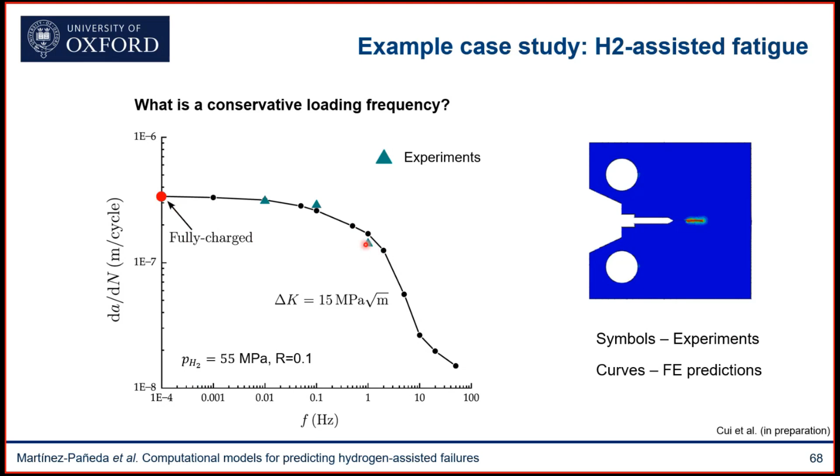But the other piece of good news is that in this limiting case, it's again not too far away from those crack growth predictions you get at 1 hertz for this particular material. So it could be that they're running the experiments, not being non-conservative, but running experiments in a scenario sufficiently close to reality.

Let me just finish with this very last case study. This is related to one of the big questions in our community these days: can we use the existing natural gas pipeline infrastructure to transport hydrogen? Of course, the key problem here is to be able to predict the structural integrity of welds. Will the welds withstand hydrogen, what pressures of hydrogen will they be able to withstand, and what hydrogen levels, what hydrogen purity can we transport?

Ideally, we want to transport pure hydrogen at very high pressures. This is very complicated to determine experimentally because it's difficult to capture the conditions in the heat affected zone. We cannot produce standard compact tension samples from the heat affected zone, so the welds are too complex to test experimentally. There are also residual stresses, making it a complicated process to test.

Real scale tests are also complicated because you have an oxide layer that prevents hydrogen uptake. So you may run a large scale test that's very expensive and find that nothing happens. Then in practice, after 10 years, you get disruption of this oxide layer due to fatigue, and suddenly you get a structural integrity problem.

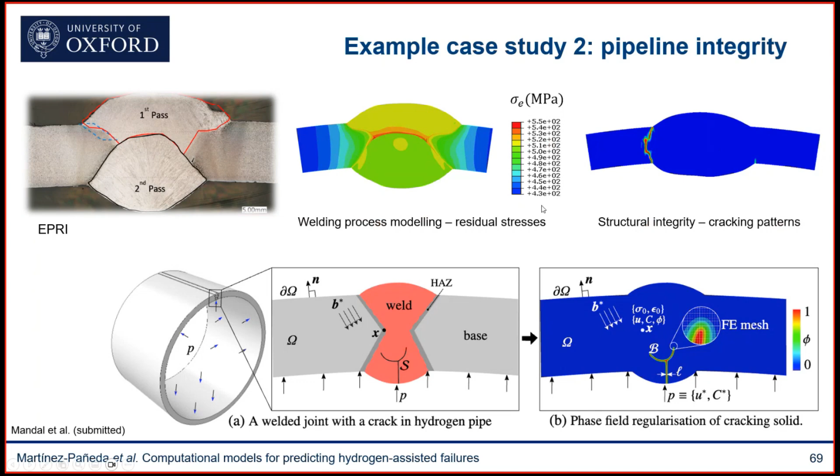So we can use the model for that. Here we have a model that simulates two stages. First, we simulate the welding process, so we're able to predict the residual stress distribution. There's a lot of nice work in the welding process community with sophisticated models for predicting changes in phases and residual stresses during welding. Then we couple that with the models I showed you before, so we're able to predict the structural integrity and cracking patterns in the parts.

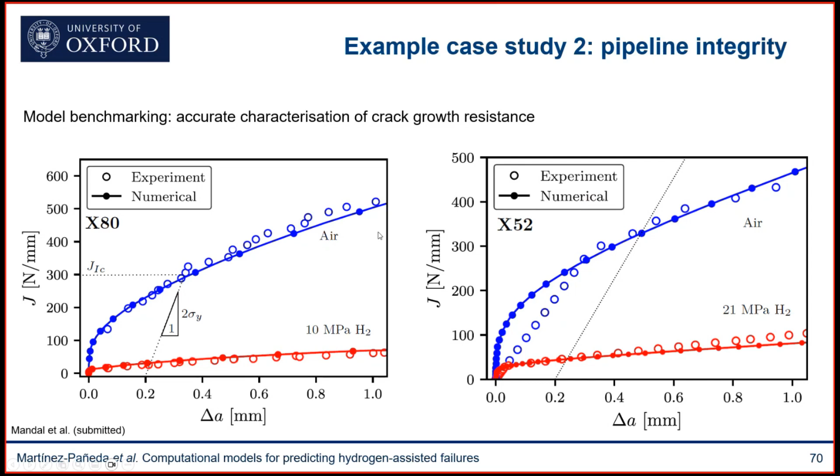First things first, we want to make sure the model works well, that it's able to capture, for example, the plastic dissipation you get with sustained crack growth. So we simulated crack growth curves for the two materials we're interested in, X80 and X52 pipeline steels. We get very good agreement with experiments both in air and at various hydrogen pressures. With this model that seems to predict the fracture resistance of metals well, we first conduct welding process simulations.

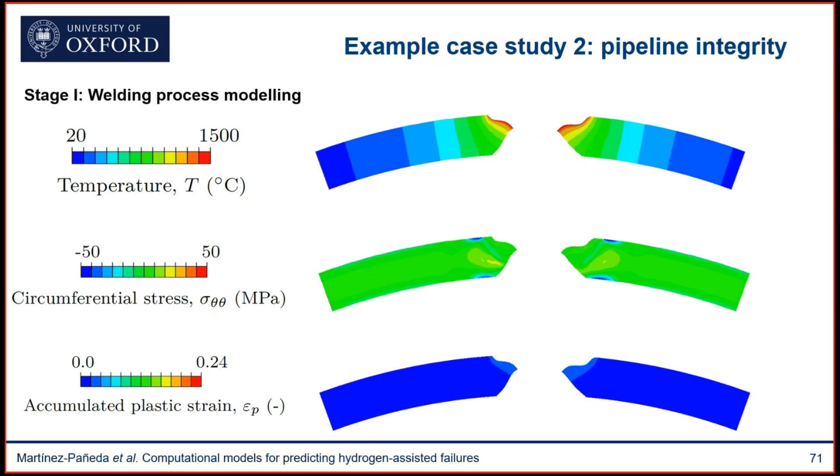So we apply a torch. In this case, this is a seam weld with two passes, so we can predict the distribution of the hydrogen content, the temperature, the stresses, and accumulated plastic strains.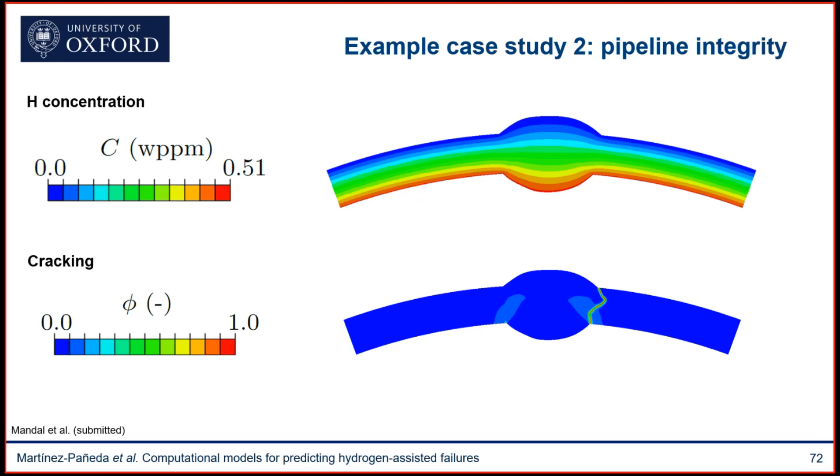Basically what we want to do here is consider two scenarios. One is what we call plastic collapse, a situation where you get complete yielding of the pipeline before cracking - this is what we want to have. The other is a situation where you get brittle fracture before this plastic collapse scenario happens. We increase the pressure until we see this brittle fracture occur, so we can quantify the critical pressure at which you can transport hydrogen in existing natural gas pipelines.

Then we use the model to answer questions we want to understand. The first is whether residual stresses matter or not. We found that for the X52, residual stresses did not matter - this is a more ductile material, less susceptible to hydrogen embrittlement. In both cases, with and without residual stresses, in the absence of defects, we found that failure was due to plastic collapse.

However, in the X80, which is a more brittle and susceptible material, we found that incorporating residual stresses changed the failure mechanism from plastic collapse to brittle cracking. This is attained at a pressure of 31 megapascals. So residual stresses can matter depending on your material and conditions.

We also wondered whether the porosity that comes naturally from the welding process would play a role. We found that it plays a little bit of a role, but not significant - this only mattered in the X80. As you can see, when we move within a sensible range of volume fraction of microvoids, we only see a small drop in the critical fracture pressure, down to 24 megapascals for 0.5%.

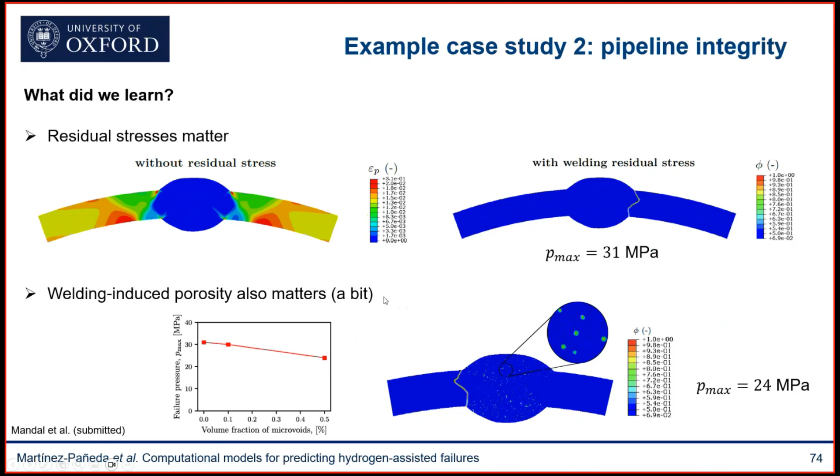Of course, what we were very worried about was the role that pre-existing defects will play. These are vintage pipelines that have been there for 50, 60 years, so we suspect that there will be defects in there.

So we tried to conduct a systematic study where we try different sizes of defects along different orientations. And what we found is that the most critical scenario, as you would expect, is one where you have defects lying along the heat-affected zone. We saw that these defects of 3 millimeters could reduce the critical pressure to 15 megapascals.

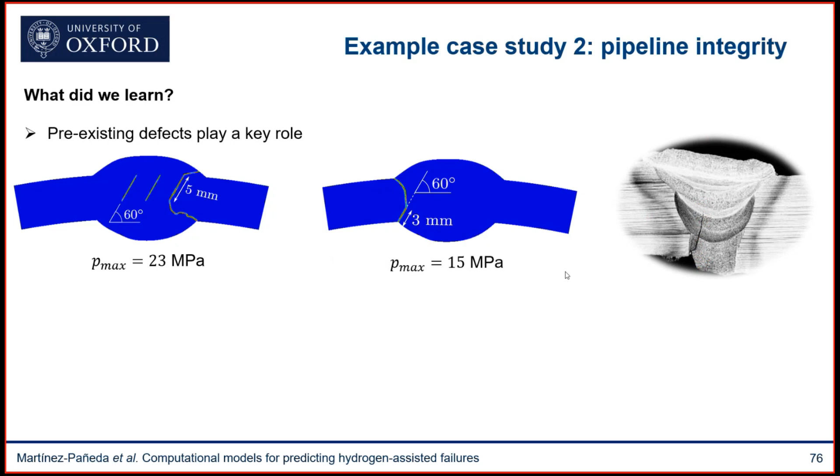This is important because, first of all, those defects have been reported to exist. We know that these kind of defects along the heat-affected zone of this size are observed in welds. Second, this critical pressure is within the range that gas distributors are considering to transport hydrogen.

The other aspect is, of course, the role of the microstructure. We know that the microstructure can be very heterogeneous. This is a working collaboration with EPRI, I forgot to say, so they have very nice hardness maps, and we can use these hardness maps to quantify the heterogeneity of the microstructure.

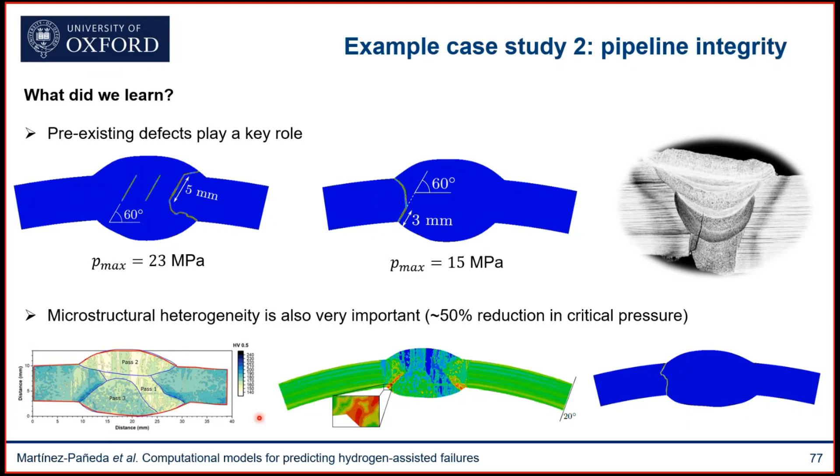Then we can make our properties depend on this heterogeneity. So we can have, for example, these small thin regions of harder material, which are more susceptible to hydrogen. When we account for these things, we see a 50% reduction in critical pressure. So microstructure does play a role in this aspect.

That's all, that concludes my talk with a few last-minute concluding remarks. The first thing I'll say is that recent developments in the computational mechanics community, namely multiphysics modeling and phase field modeling, have been key to developing very robust and mechanistic tools that allow us to resolve the physical processes of hydrogen embrittlement. We are able to eliminate assumptions by basically applying brute force, by resolving explicitly each of the processes involved in hydrogen embrittlement.

And this allows us to be physically based, to be mechanistic. This means that our model is dependent only on parameters that have a physical meaning that we can measure in our lab. And our model can be quite general.

So whether you agree on my interpretation of hydrogen embrittlement or not, you can use this to your benefit. We have seen other groups using this, for example, to incorporate HELP mechanisms or a combination of decohesion and HELP mechanisms, and you can incorporate this method very quickly to other phenomena.

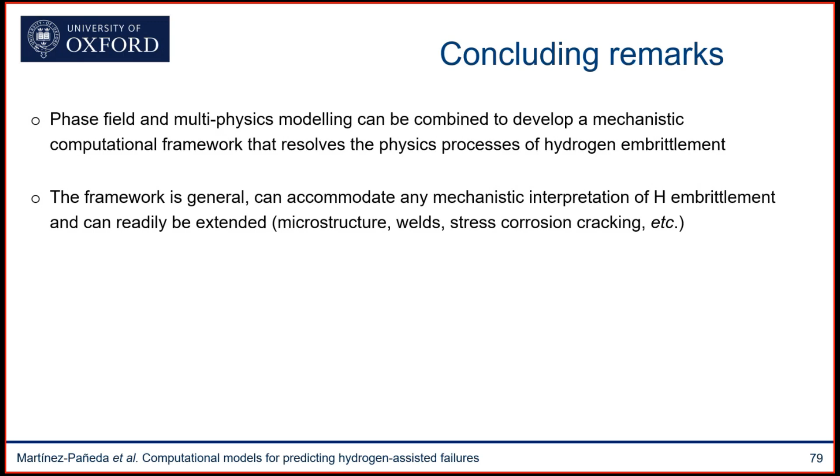You can capture the microstructure, welding process simulation, stress corrosion cracking. So it's very universal. It is, in fact, already part of commercial finite element packages. So it's easy to use, it's quite universal, and it can handle complicated problems.

I think one key aspect is that it's grounded on the thermodynamics of fracture, it's physically sound, and it's computationally very compelling. It can capture, as I said, in a physically based manner, not only fracture and fatigue experiments in the lab, but also the very complex conditions and large scales inherent to engineering practice, effectively bringing this virtual testing paradigm to hydrogen-containing environments.

I think there are multiple things you can do with this model, but two case studies I wanted to show today: one where we could do virtual fatigue crack growth experiments for arbitrary conditions. Conducting hydrogen gas fatigue experiments is expensive and problematic. You can do this very cheaply and very efficiently with this model.

We have shown that the model is able to blindly predict the Sandia data and is able to extrapolate and interpolate beyond that data. You can also handle other conditions that you cannot handle in the lab. For example, we have shown today that we can determine the maximum admissible pressures you can use to transport hydrogen in the existing natural gas pipeline infrastructure.

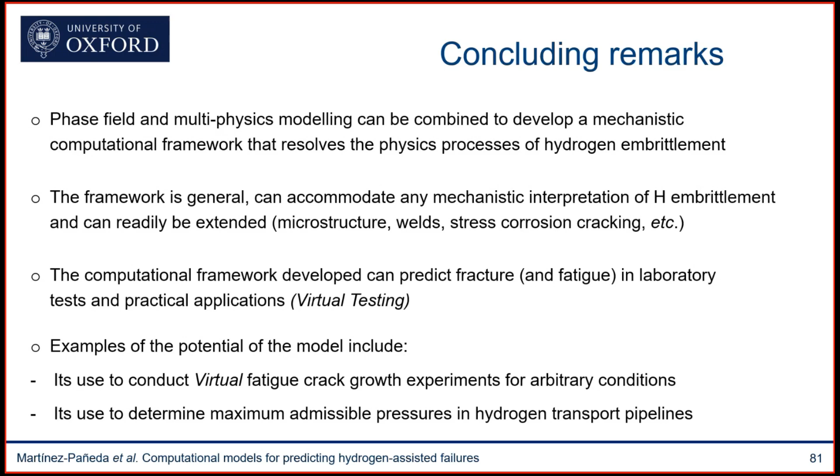So I'll conclude by saying that all the codes we have developed are openly shared. Many of the commercial finite element companies are also adopting our models. COMSOL, for example, has included some of our hydrogen embrittlement models.

We have used a variety of softwares. We use sometimes commercial finite element packages such as Abaqus or COMSOL, but also open source such as FEniCS, or in-house codes in MATLAB or C++. All of them are available for you to download on our website.